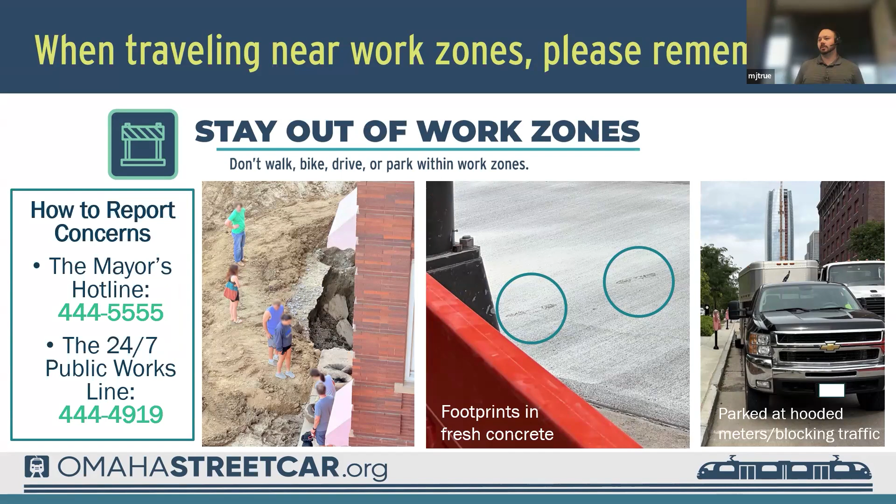And additionally, make sure, really importantly, you stay out of the work zones. If you have concerns, there's the mayor's hotline for regular business hours. There's also the 24/7 public works line if it's something outside of that. If something is burning, flooding, something like that, yes, there is 911 if there is an immediate life, health, safety, welfare of the public issue that you're seeing. But otherwise, please stay out of it.

First picture, there's a collapse there. You don't know the state that it could be in. You could have a continued slide. Someone walked through a recently finished bit of concrete, leaving some footprints, and then people are parking. The last one, someone parked at a hooded meter, making it difficult for the work to continue, and that just slows down construction and actually is going to lead to longer timelines. So again, please stay out of the work zones.

Our overall construction schedule, you can see as we're now in the 8th month, believe it or not, of 2026. It's kind of flying by. We've got pretty much everything going from Turner on down to the mainline construction work. Turner will be wrapping up here in the next month or two, at least for the field activity that you'll see out there. The bridge is well on schedule, and somewhere around Labor Day should wrap.

And we'll also see, hopefully again, early next year, late this year, Utilities East project is ahead of schedule. It's definitely going to be before June of 2027. And our VMF is also trending a little bit ahead. So we got through basically the end of this year, and then we're going to get down to being just track construction and all those direct rail related requirements.

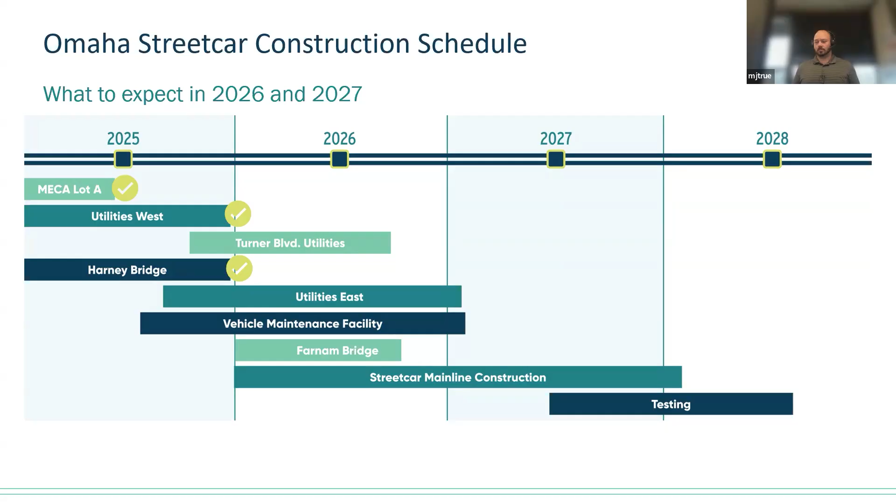And we're now into streetcar projects, and with that, we'll turn it over to Steve Rue to start off with some of them. Awesome. Thanks, Mike.

Starting out with the bridge package. So this project just continues to move right along. I mean, really, we don't have very much longer to go, but we haven't had too many issues with this project. So it's been really great. If you drive by, you see exactly what looks like a bridge at this point. Like it's very nearly finished. The upcoming work we have left is the various appurtenances, fencing, items like that.

Recently, we've completed the traffic signal work and the abutments. So really, we're very, very near completion. There is probably the most significant amount of work left on this specific project along 29th Street, there at the edge of the bridge.

That work has about a month left to go. The completion of that work right now is lining up to coincide very well with the Turner package, so that's fantastic. Those two packages will kind of wrap up roughly about the same time based on current projections, and we should really be opening traffic back up through here. We'll have both bridges done. I know that seemed like a long ways off 2 years ago, but we're very, very near the end here.

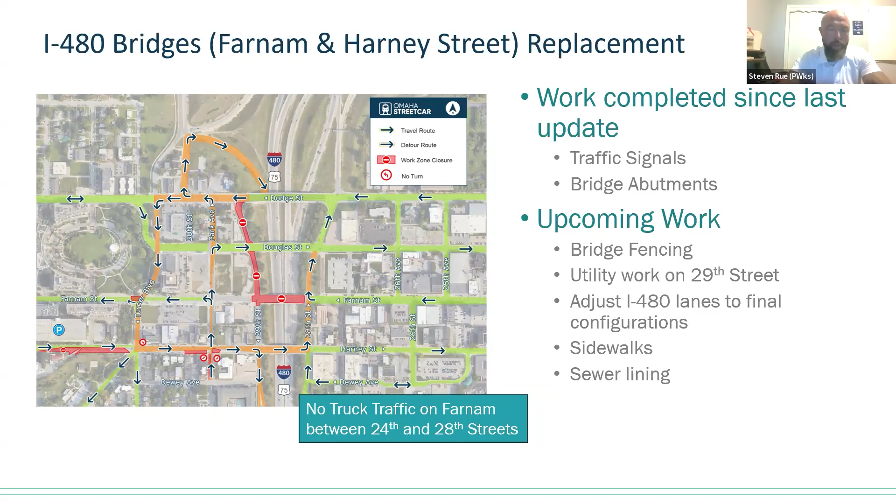Moving on to the next.

Utilities east. The slide looked a lot different at the beginning of the year. There were probably more little text boxes than were even possible to read. So it's really great, you can see none of these call out electrical work. The electrical work's essentially done for this package. We've completed all the work that needs to be done there. You can see the work that is complete. That shaded area just continues to move to the west, which is great.

We're down to mostly water main work as our significant impacts. There's still some sanitary work to be completed throughout the remaining portion of this project, 24th Street, 20th Street West. But as Mike pointed out, we're coming into the end of this year and we'll be down to pretty much just track work. This is kind of trending this way.

For this specific project, I do believe the last area that will be complete is 24th Street. We're going to see most of the rest of this work get complete all the way out to the bridge, and then probably a crew drop back to do that last bit of water main work right there at 24th Street. But again, just continue to move forward. A couple months left in this one.

The traffic impacts are starting to lessen a lot from this specific package. We're turning a lot of areas over to the track crews so that that work can continue on time. So this project's moving along really well.

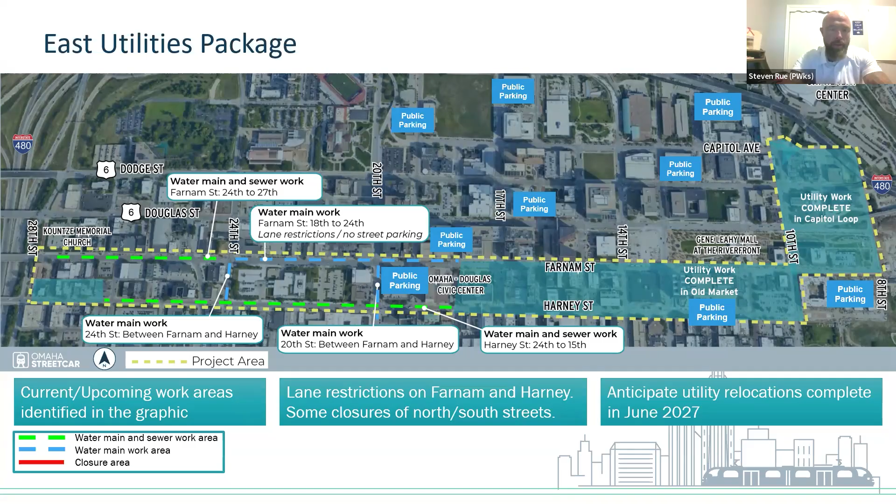The last project that we still have active is the Turner package. This package is also nearing completion. We're putting back most of the final paving right now. We do have some remaining punch list items that need to be complete in the large manhole structure that was constructed. If we remember a few months back, there was the very, very large manhole structure in the middle of Turner there. You're going to see some crews working in and out of there just to finish up some punch list items and tie up that structural lining that was put in down there.

They probably have about a month, 5 weeks left of that work. And those two packages, if all goes well and we maintain schedule right now, we're looking at the bridge and Turner coming to a conclusion at roughly the same time. And you're going to see traffic open up through here. You'll see us out there doing the remaining grass and tidying up and things that need to be done before main line comes through.

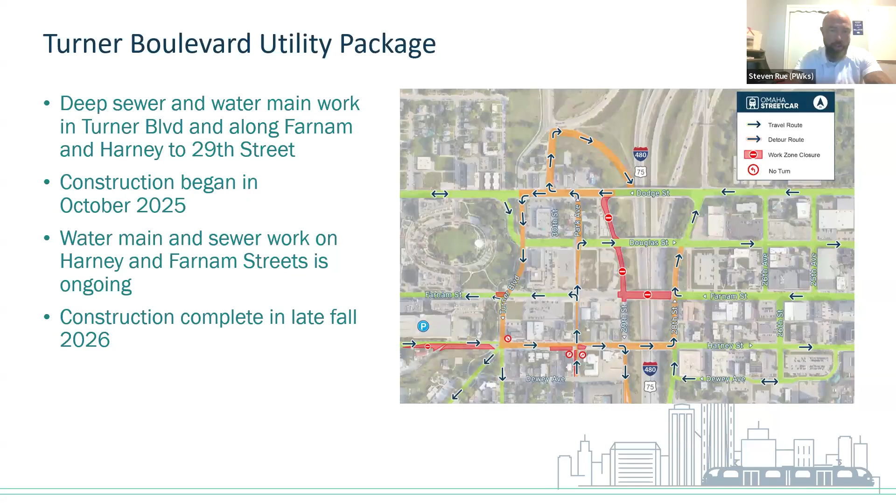This package is coming to an end. If you drive through there, most of what's left is just paving.

So my section of this just keeps getting shorter and shorter, Mike. So I'm going to give it back to you. Certain there's no complaints there from you on that. Thank you, Steve.

As he said, as the utility work wraps up, we continue along with track work. This is an overview of the area, approximate areas and times that they're going to be out there. Orange at the west end, purple, the light green, the red are going on now. And soon later on this year, they'll be moving into the blue and the gray.

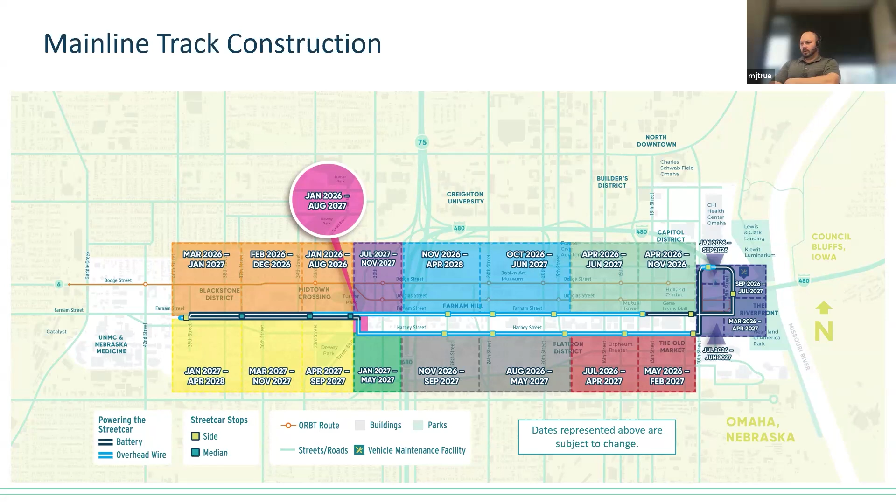Just want to remind you, we do have bridges out there, and we are requesting staying out of the work zones, don't hop the fences or the traffic barriers, even if they are shorter than human height. Please use designated crossing points, either intersections that have been left down or these ped crossing areas.

Working at the east end, they're kind of finishing up down there. If you drive past, it's pretty exciting. Most of the rails and all the siding is cast in. You've got striping, some of the appurtenances to put back, such as the parking meters still to go, but that's wrapping up here pretty soon.

Moving on to the next phase, they're still in the paving, and they'll still have some of the side parts to put back, and they're not quite as far along as everything from 34th to the east, but this should also wrap, we're hoping, by the end of the year.

Moving on then to the other part, where they've got track basically up to 36th, 37th Street, just down the block from Jay's, it's still sitting out, hasn't been cast in there. They're still working on some of the sub base, and we're still working on some of the civil work out this way.

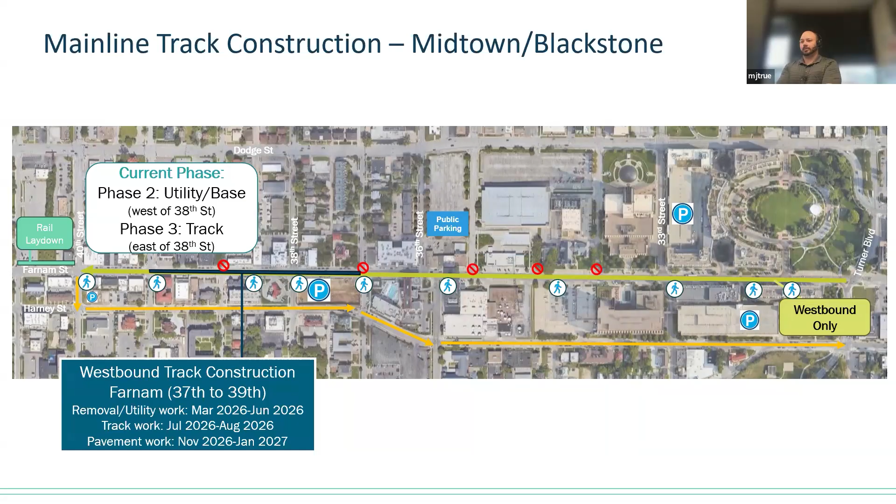Going back to the east end, Capitol Loop. I do want to mention that westbound on Douglas Street is going to be ending by the end of August, likely the week of August 10th. That'll come down after Maha. Right now, 8th Street southbound has reopened, so that way anyone who comes in here, say on the Capitol Loop, you can get out and go over to the Harney Street exit.

Farnam, this is the one part of Farnam that is still eastbound only. Please don't drive west. Again, we're highlighting where the crossings are at, everything else. If you're down here for large events, particularly if you're parking in MECA Lot A, we are still encouraging you to take Douglas Street where it turns into Riverfront Drive and to take you out to Abbott to help with traffic flow.

Should note that the corner upcoming around there, they are starting to put in the track. That's technically zone 3-2, but that's that back corner that got started towards or in and around College World Series, and they'll continue to work their way around the loop. So that's part of the reason why the Douglas Street detour is going to be closing, because once they get that all placed, they'll be moving south.

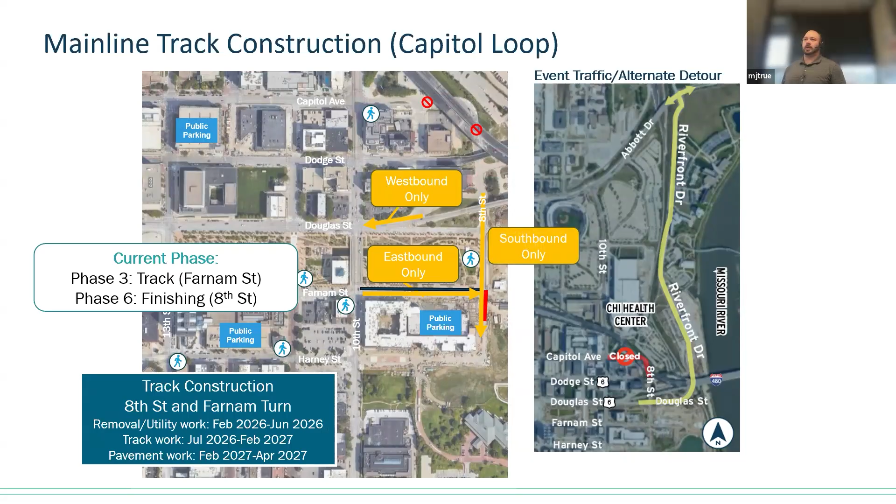We are currently wrapping up there on Farnam. We ran into an issue with a sewer that had to be repaired, as of I believe it was this morning or last night. That issue has been taken care of, and they'll be getting back to casting all that track work in and finishing it up.

10th Street work, for anyone who's been out there, you may have noticed that they were originally doing their rolling effort where they pothole and whatnot, and demolition has actually begun. Dodge and Douglas are going to have to be done in half phases because that's a pair for east-westbound on a state federal highway. So that'll, if you see it get necked down there, that's why.

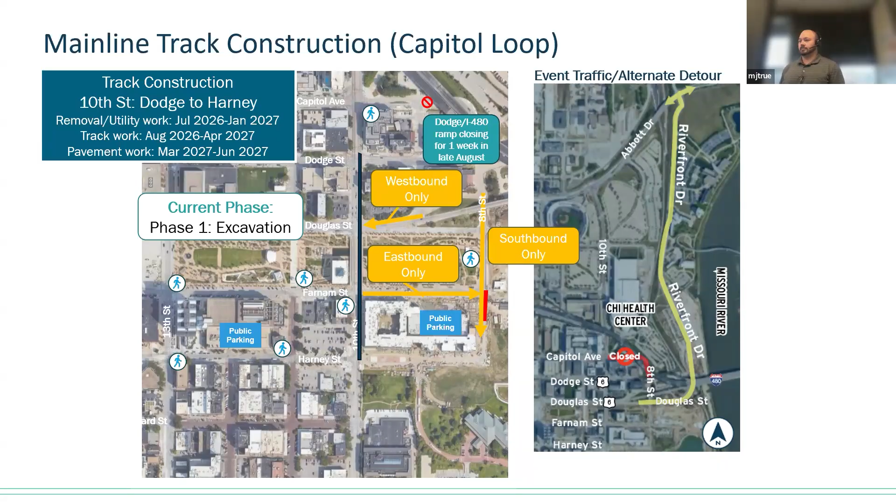Moving out a little bit now back to the west in the old market area, they still got their rail laydown pile there, and they are from 10th Street going out to 14th. We hope to have a little bit more poured in here starting tomorrow, weather permitting. Today's pour got canceled due to rain.

But again, highlighting where you can cross and where you can park, and then the circle with the red slashes to remind you where that street dead ends at.

On Harney, they're a little bit further behind. They started this work behind the Farnam Street phase. They've gotten most of the base down and a lot of the utility work continuing on, and soon we'll have a rail pull into this area.

From 14th Street going west, they're currently in the demolition phase, so you'll be out there, you'll see them removing pavement north side of Farnam, and then they'll get into all the other normal work with comms, power, base, and anything else in that excavation.

Harney side is going to stretch from 13th to 18th. That was recently turned over to them as our utility contractor had finalized their work in the area, the last of some of the sewer lining. There's still a little bit more that's kind of getting a little double duty from 17th to 18th, but this is now Kiewit's area to go.

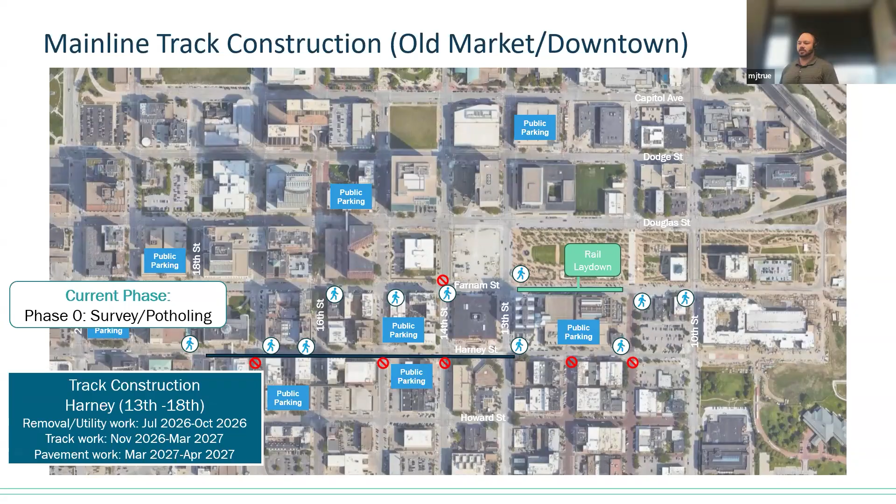They're just past about 15th, 16th Street, continuing to go down and pothole, locate utilities, and complete all their pre-activity survey.

16th Street is closed at Harney up to Farnam. This is a power duct line that has to come in along with several vaults for that system. The power substation itself is at the north end, just across the street from First National Bank, and then continues down. So we're starting at the south, working our way north.

And they've got demolition and they've got the excavation for that vault. Again, weather permitting, we're going to hopefully be getting back into doing work in that area soon.

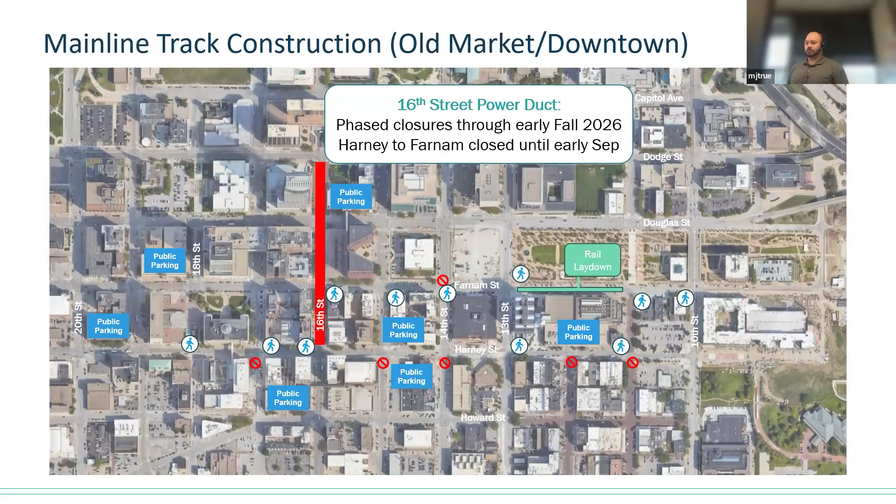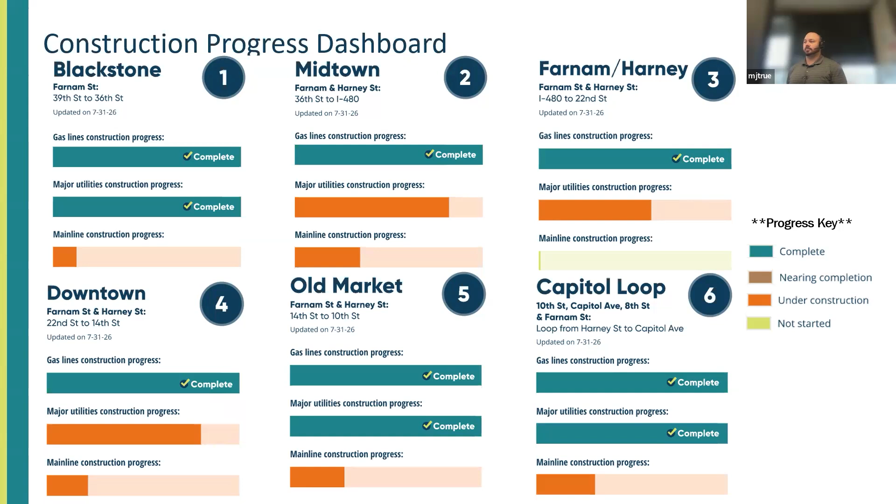Again, our construction dashboard is updated, I believe, bi-weekly. It shows we're all happy to see the gas work is completed everywhere. Major utilities are wrapping up and very near completion in most areas, and mainline work has broken ground just about everywhere. So this project really is progressing along.

And with that, we'll turn it back over to the communications team, Wendy and Alyssa.

Awesome, thank you Mike. So we have several public involvement opportunities. The first being our webinar, which we do every first Wednesday of the month at noon. We know these are hard to attend in the middle of the day, so we also put them online. If you pre-register, you can send us your questions and we will respond during the webinar, or email you directly if we need clarification on your question. Please join us the first Wednesday of every month or watch online after. Our next one will be September 2nd at noon.

We also have monthly Streetcar Authority board meetings. These are open to the public, and everyone is welcome to attend. We highly encourage everyone to attend. Our next one is August 17th at 1:30 here at the Civic Center. You can also find that information on our website.

Also, another good way to get updates is our website. We update the neighborhood content every Thursday afternoon. Currently our website is down - we're doing some maintenance on it. However, if you go to publicworks.cityofomaha.org, you can still scroll about halfway down and see our maps with closures. So if you need that information, it's still available to you. This information is also still being sent to GPS apps like Google, Waze, and Apple Maps, so if you're trying to find a destination, those GPS apps should all be updated for you.